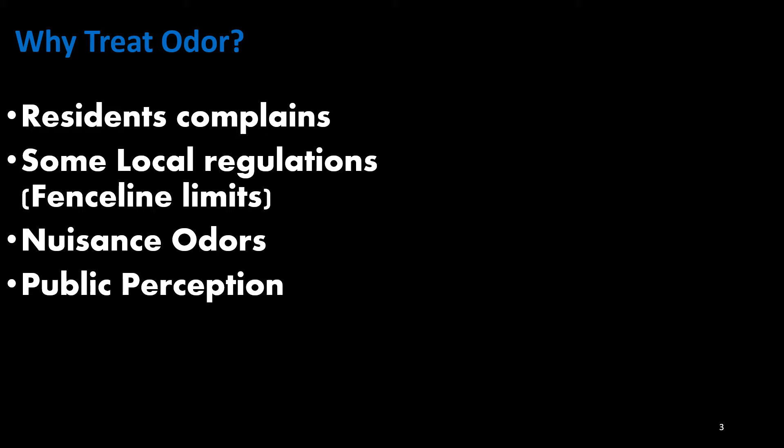With the growing businesses around wastewater treatment plants, it's really important to address odor emissions. A lot of businesses are complaining about odor emissions from the treatment plants or from the collection system. And so it's really important for municipalities to address the odor issues. And there are also some local regulations where we have fence line limits that have been established to actually force and help the plants achieve the odor control strategies. And it's also important for treatment plants to be good neighbors and change the public perception of odor pollution.

So when it comes to odors, we have really two main families of compounds. So the first one is hydrogen sulfide, which is a well-known compound. It has a rotten egg type of smell. It's highly corrosive. I think most of us know that hydrogen sulfide can actually promote corrosion, both in the collection system and also in different wastewater treatment units. So in addition to hydrogen sulfide, we also have organic sulfur compounds, which are mainly composed of methyl mercaptan, dimethyl sulfide, dimethyl disulfide, and sometimes carbon disulfide. They have a rotten vegetable type of smell.

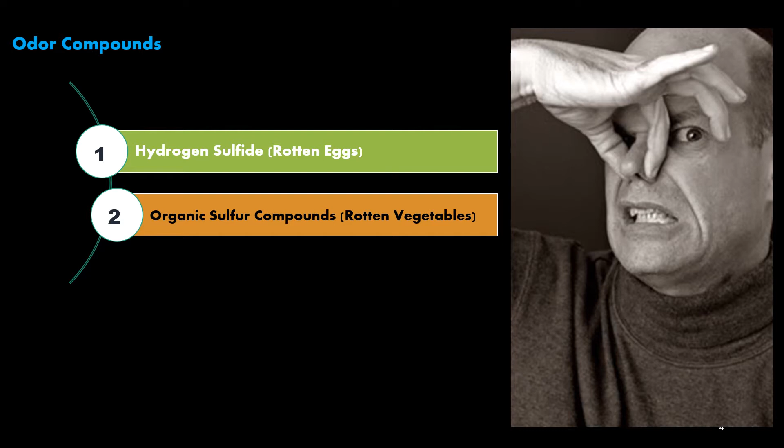We also have different odor compounds. We have nitrogen-based compounds, ammonia, amines. These compounds are highly volatile, and usually when it comes to odor control, they are not really considered. We also have other compounds such as VFAs or other VOCs that are also contributing to odors. But really, when it comes to odor control design, both in liquid and gas phase, we usually focus on hydrogen sulfide and organic sulfur compounds.

So, like I said, when it comes to odor control, mainly we have two ways of controlling odors. Either directly in the liquid, so basically preventing the odors from being emitted into the gas phase, or in the vapor phase, which is basically capturing the foul air from the different treatment units or from the collection system and treating the foul air. So for the liquid phase, we have different strategies. We can go with oxidants, pH adjustment, or precipitants.

So one way to control H2S and prevent H2S in the liquid from going to the gas phase is to actually use a chemical oxidant, which will mainly convert the H2S back to sulfate, thus preventing it from being emitted into the gas phase. And for that, we can use oxygen, chlorine, hydrogen peroxide, or potassium permanganate.

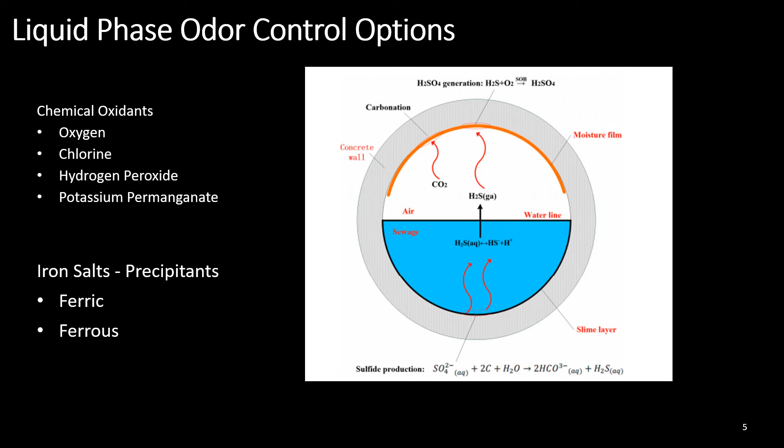So mainly we need the sulfide loading, we need the wastewater flow. Of course, we need the BOD loading because the oxygen uptake rate will depend on the BOD loading. You don't want your injected oxygen to be taken up by different types of organisms.

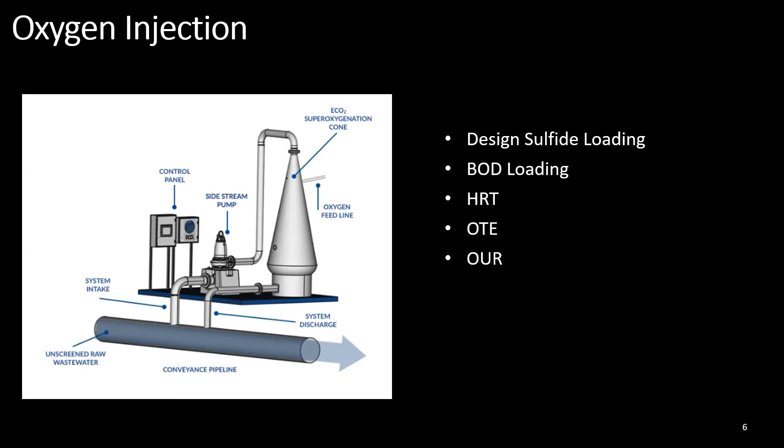The effectiveness of this odor control technique depends on the retention time. So usually we need at least between 20 and 30 minutes retention time for the oxygen to fully transfer into the liquid phase and then convert the sulfide into sulfate or sulfur. Another parameter that we look at is the oxygen uptake rate, of course, here.

So what we do, we will shift the pH, increase the pH to levels between 8 and 10, so that all of the sulfide in the liquid is in the form of bisulfide. So by doing that, we actually prevent the sulfide from going into gas phase. This is a really great technique as well that we can use.

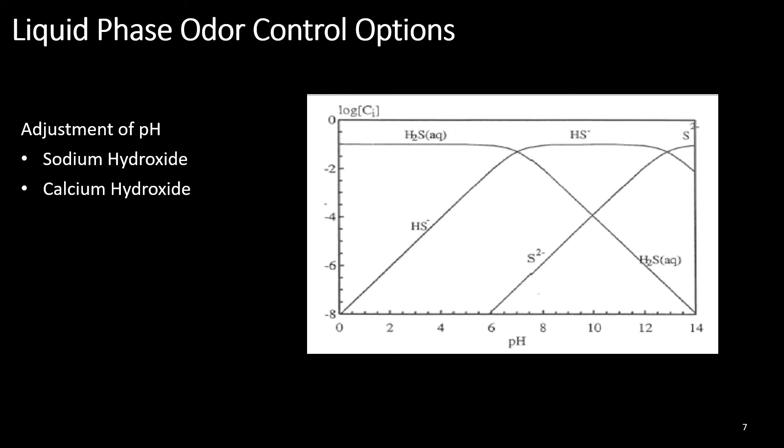I will say that the con for this technique is the cost, because it generally requires a high amount of chemical feeding, and so when we use this technique, it's usually for lower flows, flows between 10 to 50 MGD influent wastewater flows. Otherwise, it has been shown to be really effective in the collection system, and also in plant headworks treatment, as well as in the primary clarifiers.

And in addition to that, we use pumps to pump the gas from the flux chamber to canisters, and that's where we actually take our samples and we take them to the lab and we analyze for organic sulfur compounds such as methyl mercaptan and dimethyl sulfide.

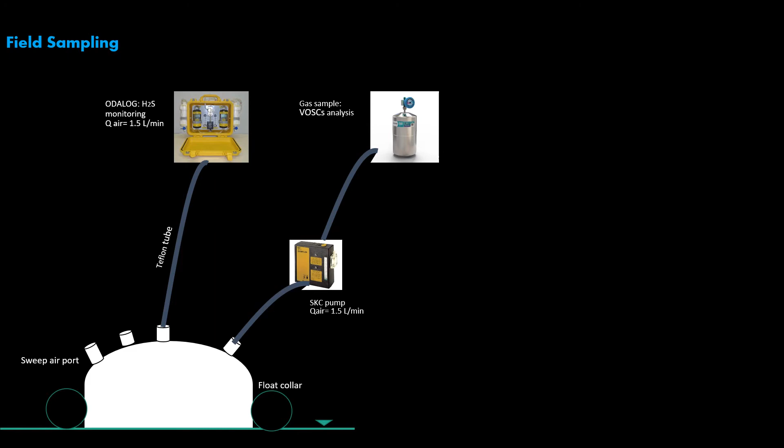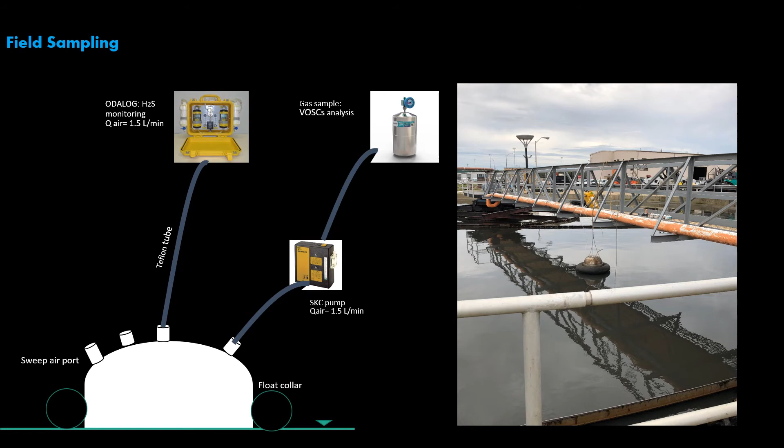Here you can see a picture of it. This is a sampling that we did at DC Water, where we actually kept that flux chamber on the surface of one of the primary clarifiers, and we were collecting a gas sample for sulfide H2S analysis and reduced sulfur measurement as well.

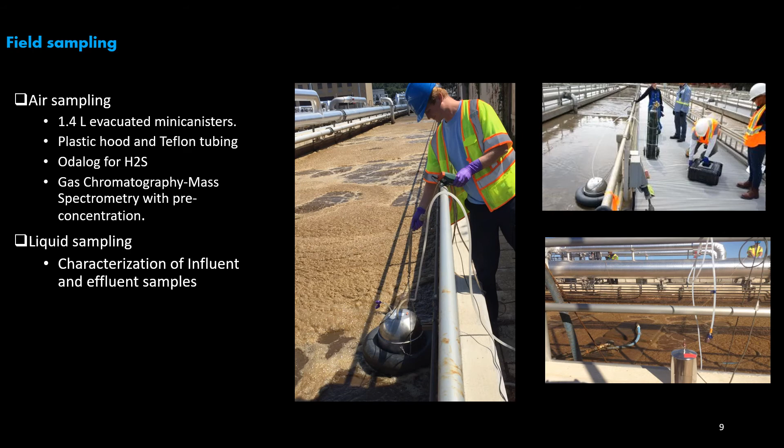So it's really the same principle, but I'll say one important thing to do when we collect gas samples is to keep track of the wastewater quality, because these definitely have impact on the sulfide emission, and it's really important to understand the correlations, so later we can understand and develop really integrated odor control systems.

Other testing that we do, we do batch experiments, and in these batch experiments we try to understand the formation of these different types of compounds. And like I said, the oxygen uptake rate is a really important parameter to know, and we like to measure that in different plants because in addition to the controlled vapor phase and the liquid phase, we also use this data in the sulfur modeling. And the oxygen uptake rate and the retention time are really important factors.

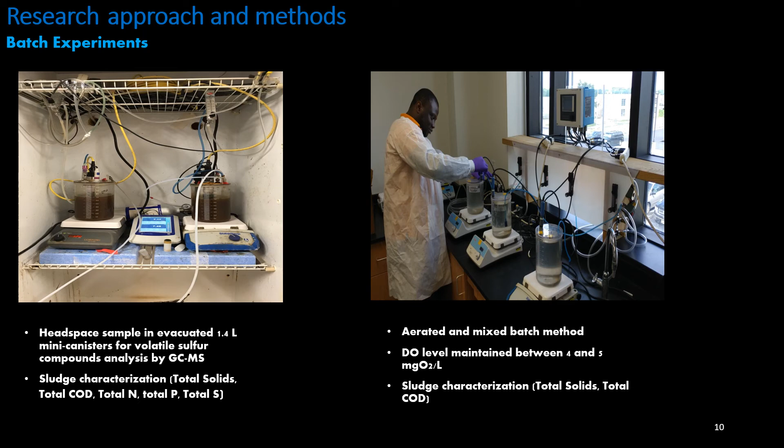And with the oxygen uptake rate, we can actually calculate different types of biomass loading into the raw influent. And this also helps in the wastewater process modeling with the sulfur cycle included.

Here are different techniques of vapor phase odor control. So basically, when it comes to vapor phase odor control, we can go with a dry media system, which is basically carbon adsorption. We can go with a chemical system, which is basically capturing the foul air and using different types of chemicals to actually convert the sulfide from gas phase back to the liquid phase. And we can also use biological systems, which are mainly composed of biofilters, bioscrubbers, biotrickling filters, hybrid systems.

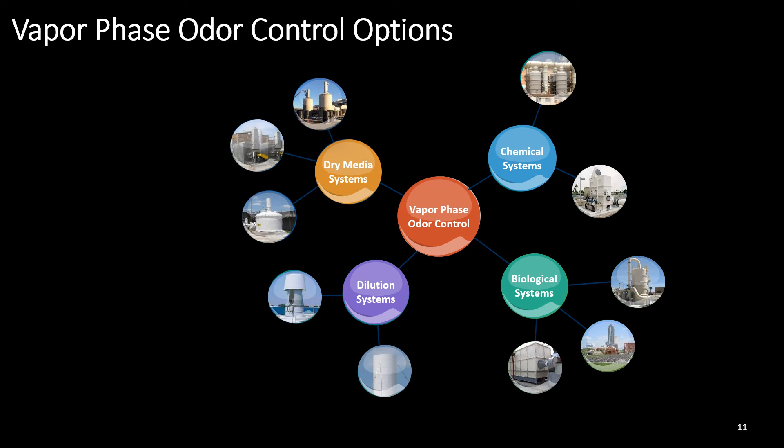And the choice of the different odor control unit will depend on different factors such as the loading and the airflows, and also the limitation with the footprint and sometimes the client preference.

So for the physical adsorption, like I said, this is mainly carbon media. We have different types of media. Some are expensive, some are not, but it depends really on the performance that the clients want to achieve. So usually these systems are suitable for low H2S levels lower than 10 ppm in the airstream. It offers high odorant and odor removal capabilities.

And depending on the footprint requirements and the available space in treatment plants or in the collection system, we can actually come up with one stage or two stage systems to effectively address odors. So the disadvantage is the life cycle cost. This technology is really based on carbon adsorption, so when the media is exhausted, the media needs to be replaced again.

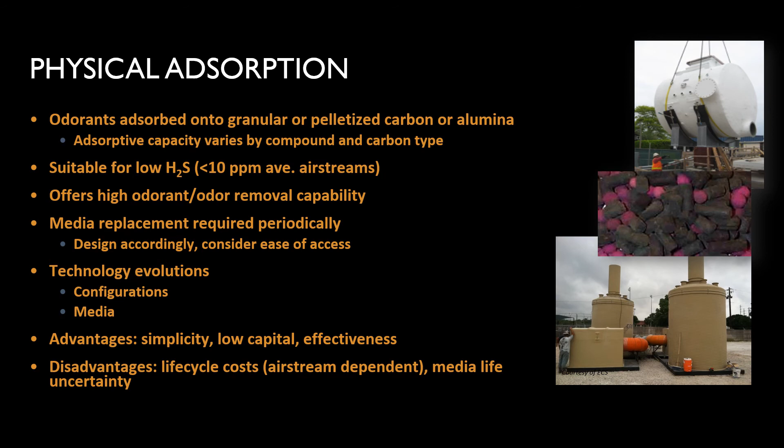We also have the chemical scrubbers. It has a low capital cost in general, and it can actually adapt to different types of airstream. The main disadvantage is these systems are really complex with a lot of manipulation required, sometimes intense operation and maintenance required for this type of system. These systems are usually not suitable for high H2S airstream. So it's important to take into consideration these different factors before choosing the right technology.

And like I said, for this system, we use a lot of chemicals, and these chemicals need to be disposed. And sometimes they end up in the wastewater raw influent. And so it's really important to take that into consideration when it comes to chemical scrubbers.

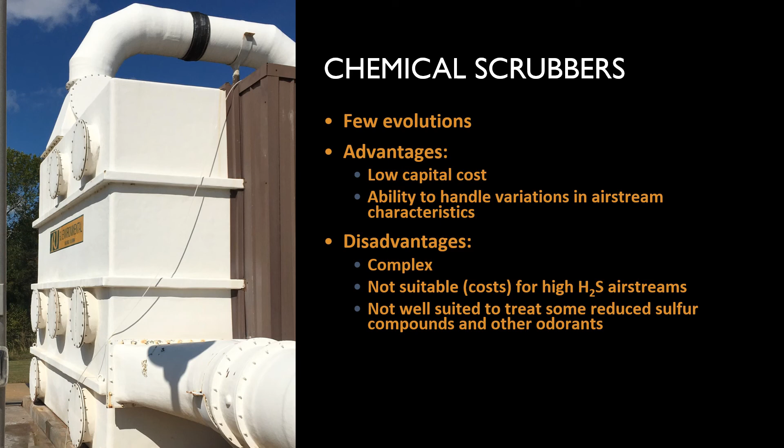We also have the biological treatment. Mainly we have biofilters, which are really common. We have different types of media available on the market. We have minerals, shell, lava rock media. We have long residence time requirements, 30 to 45 seconds. And they are really suitable for low H2S, sometimes between 5 to 20 ppm.

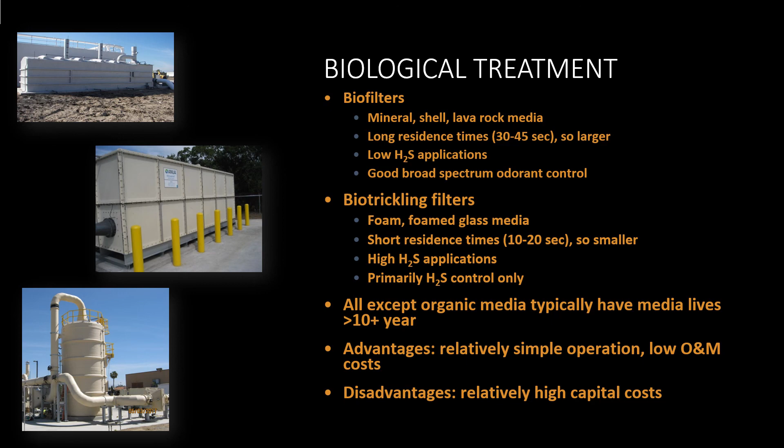Biotrickling filters actually require a lower retention time, between 10 to 20 seconds, so they are smaller. So these are really important when footprint is an issue, and they are mainly used to control hydrogen sulfide. So sometimes when hydrogen sulfide is not the only odorous compound, this technique can be used in series. So basically use a biotrickling filter upfront, and then a carbon media in the back as a polishing step. The advantage is it's much more simple to operate, and it has a low O&M cost. And as a disadvantage, it's pretty expensive compared to dry media or biofilters.

Another option here is the air dispersion technique. So this technique is usually used for odor control in primary clarifiers, airstreams with low odor strength. Sometimes used for polishing steps.

It has a low profile, but the only issue is that this unit is sometimes loud. So some clients actually don't adopt this technique because of the issue with the noise. So it can offer the offsite impact of dry media treatment at a fraction of the cost. So it's cheaper compared to other control techniques, but it can be very noisy sometimes.